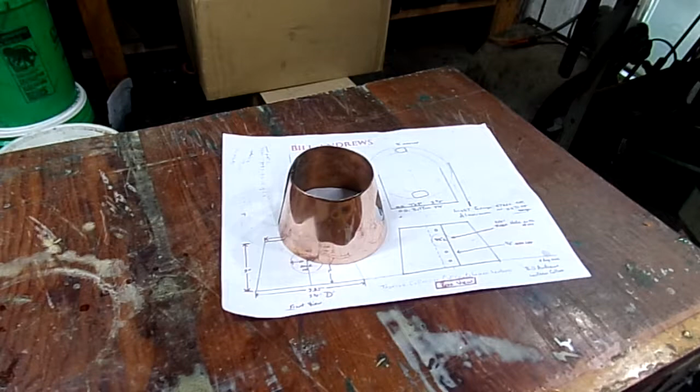Here we go. I got that custom collar done. We did it in copper, and I used the split rivets, and I think it looks pretty good. As I said in my previous message, unfortunately, I spaced out, and I forgot that this was 3 1/4 and worked like it was 3 1/2. But as you said, it's going to be okay.

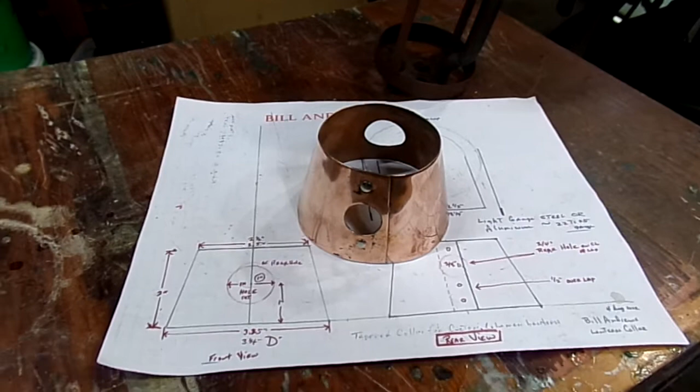Now, when we first talked about this project, I said, well, heck, of course I can do that. How hard is it to roll up a piece of sheet metal and make a collar out of it in 2 different sizes? Well, it was not as easy as I thought.

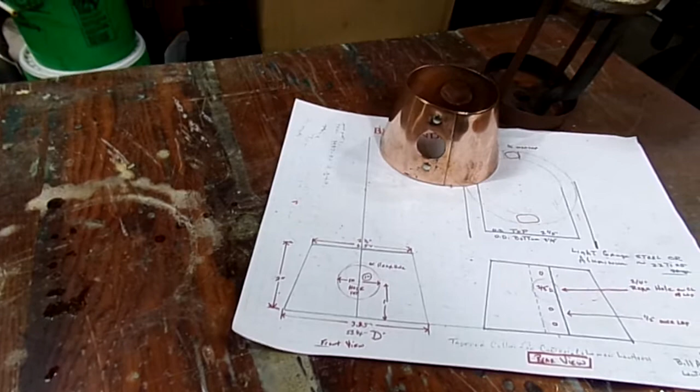At first I thought if I just made a cardboard buck, with a 3.5 inch circle and the same on the bottom, I could wrap something around it and get the correct measurement and all that. It didn't work that way. The cardboard was too flexible. My first couple of tries at that came out all crooked and everything, so I realized I was going to have a buck that was more substantial, so I had to turn one on the lathe.

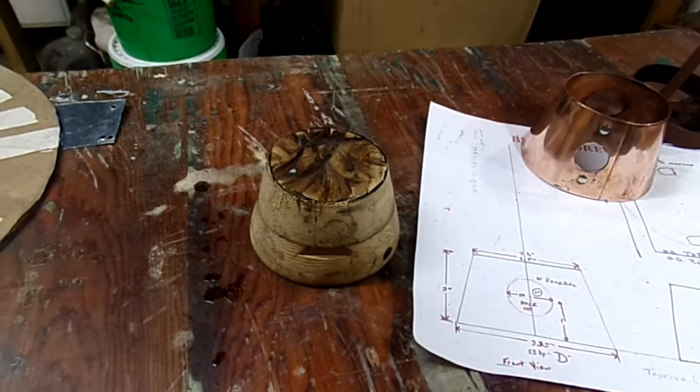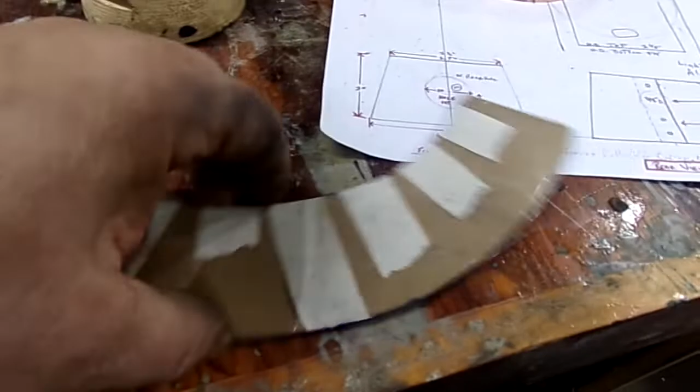So I got it turned, and I wrapped some sheet metal around it, and another issue was getting that seam to be perpendicular and not crooked like this. See how that seam is crooked? This is one that was not acceptable. So then I realized it was going to take more effort, and I'd have to make it a better model. So instead of wrapping a piece of sheet metal, I made a cardboard blank for that to cut my metal.

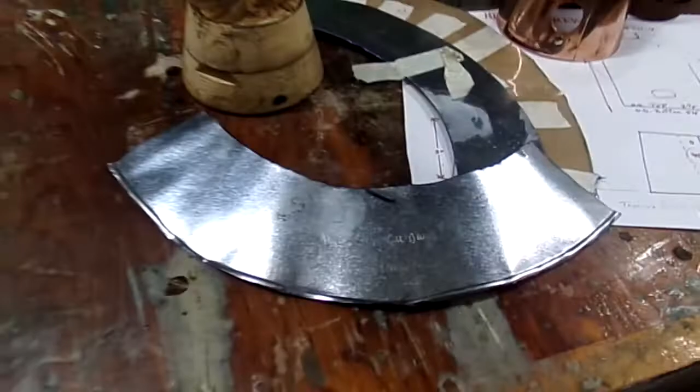And I did one out of galvanized just to see where I was at, and when it rolled up it was crooked. So then I tried again, made another one, and it also was crooked. So then I recut my paper blank and made one up. This is held together with screws, and it was okay, but the measurements were all off.

So I had to resort to sophomore geometry and figure out, if you got a 3.5 inch or a 2.5 inch circle, what's the circumference. So I did a calculation on that, figured out what that measurement would have to be to get the right opening. So I did that, and then I got it so the sizing was pretty close, and then I tried to drill holes in it.

Trying to drill holes in a cone is much harder than you would think. So what I ended up doing was trying to drill the holes into the cardboard buck, because when you drill the copper it rolls over, and that wasn't satisfactory. So I thought, okay, I gotta get scientific.

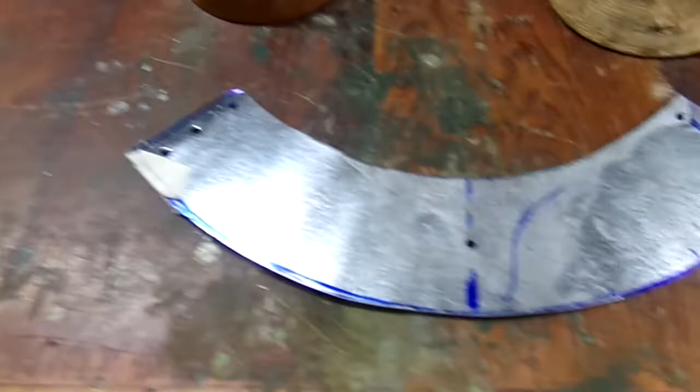So I finally made one more copper or sheet metal form, determined exactly on this scientifically by measuring and all that where the hole should be when it's rolled up. So I was able to drill my holes in the copper before I rolled it. And I also figured out what the angle had to be here so that the seam would be perpendicular. So finally, that's it.

We got it. Now here it is, buffed up in bright copper, and there's 2 things that are going to happen here. If we don't do anything, the copper is going to start to patina and get darker. Or if you want the bright look like this, I'll give it a final buff and shoot it with clear lacquer, which will keep it from tarnishing. Anyway, that's where we're at. I think we got it now, finally.

I gotta stop saying, when somebody asks me if I can do something, yeah, I can do that, because it's never as easy as you would think. But anyway, we win. There it is. You're going to have to send me a picture of this when it's done. Let me know if you want this bare copper so it patinas or bright copper with lacquer finish on it.

I'll figure out the invoicing. I'm not going to charge you straight labor on this because nobody in the world is going to want to pay $275 for a collar like this. I'll come up with some reasonable price on that. Anyway, that's where we're at. Let me know if you want it bright and lacquered or bare so it patinas.